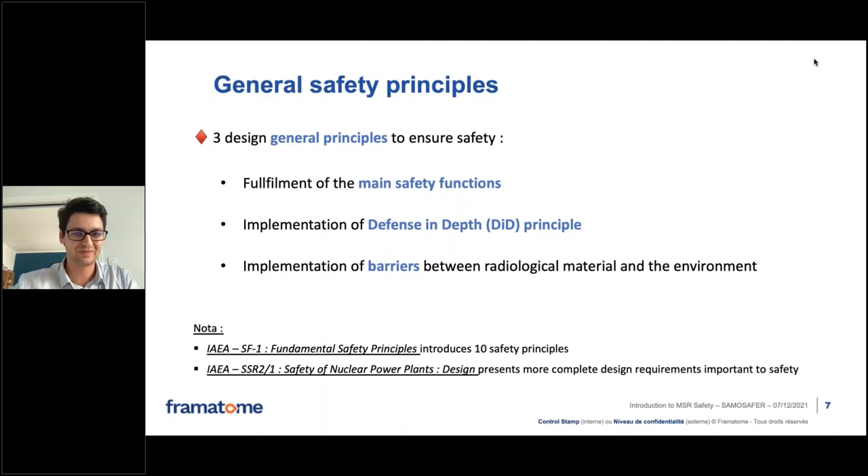So let's have a look further about the main safety functions. In a nuclear power plant, the safety implementation mainly relies on three functions: the reactivity control, the heat removal, and the confinement of radioactive material. You can note that we also talk about radiation protection of workers as a safety function, but I will not detail it in this presentation because it's specific.

You had some neutronic lectures before, and the question is, what about safety consequences? Because you saw that there are a lot of specificities for molten salt reactors compared to solid fuel reactors. Before reading this slide, I just want to precise that the issue with reactivity control is that if we have a strong reactivity excursion producing a certain amount of power that we are not able to remove, it may lead to consequences that we are not able to manage, and that's why it's very important to control the chain reaction. So for a molten salt reactor...

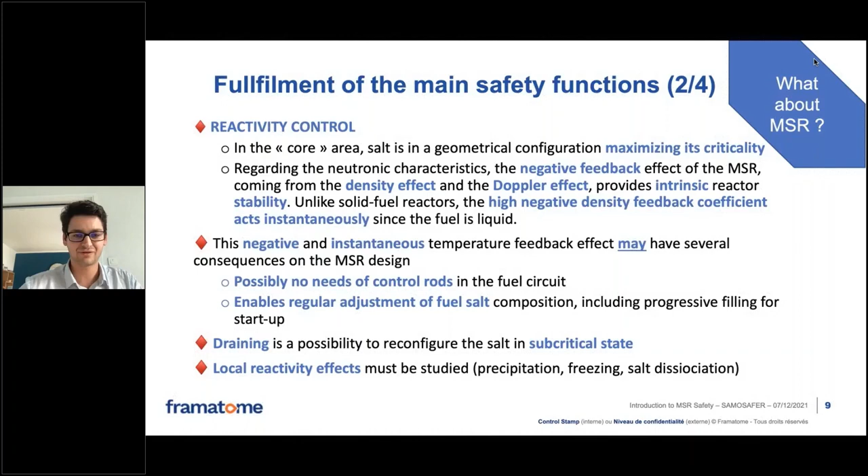So, reactivity control, now heat removal. What are the issues with salt cooling?

Finally, considering the intrinsic characteristics of the molten salt reactor, I really think the realization of this function is essential, because as we just said, for a critical salt, reactivity variations lead to a stabilization, but a stabilization at another temperature. And for structures, or even for the salt itself, the temperature must remain acceptable in order to ensure their functions, to keep their integrity, their tightness, etc. So if the temperature becomes too high, we are not able to guarantee that the performance of the structures and the material will still be enough.

So that's why it's essential to be able to remove the heat produced.

That being said, there is no huge constraint on the coolant choice, because there is no exothermic reaction identified with air or water. I don't mean that we can put those fluids in contact, but if we have a heat exchanger between the salt and some air or water, and if we have a leak, we lose the cooling function, but there is no strong additional effect chemically. So that's interesting.

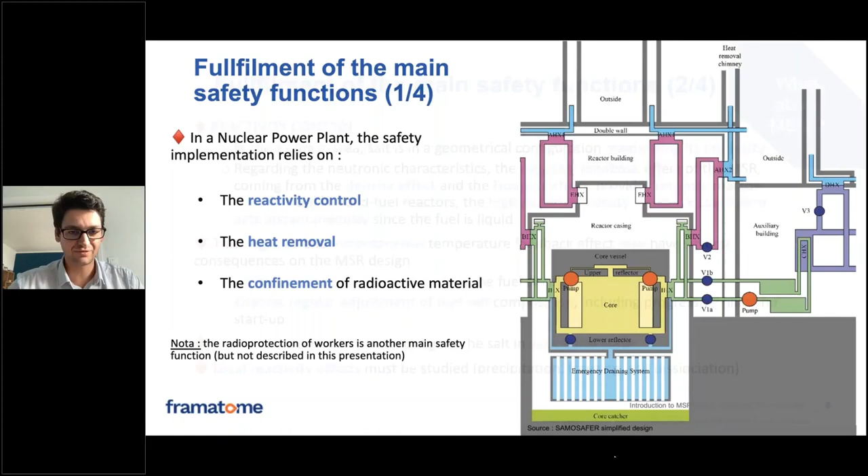So I talked about all these points. What is interesting to have in mind is that it's more comfortable to keep the salt in a critical configuration, because we still rely on the neutronic feedbacks, and that's why we generally have safety systems for heat removal implemented on the intermediate circuit.

But in case of unavailability of this circuit, we have the possibility to relocate the fuel salt. That's the idea. And when we relocate the fuel salt, we are not critical anymore, so we just perform decay heat removal.

The last point I would like to mention is that we have a multiplicity of residual power sources. We talked a lot about the fuel circuit, but there is also the fuel treatment unit, where we perform salt reprocessing, and also the gaseous extraction, because in normal operation we extract the fission products, and fission products contribute a lot to decay heat.

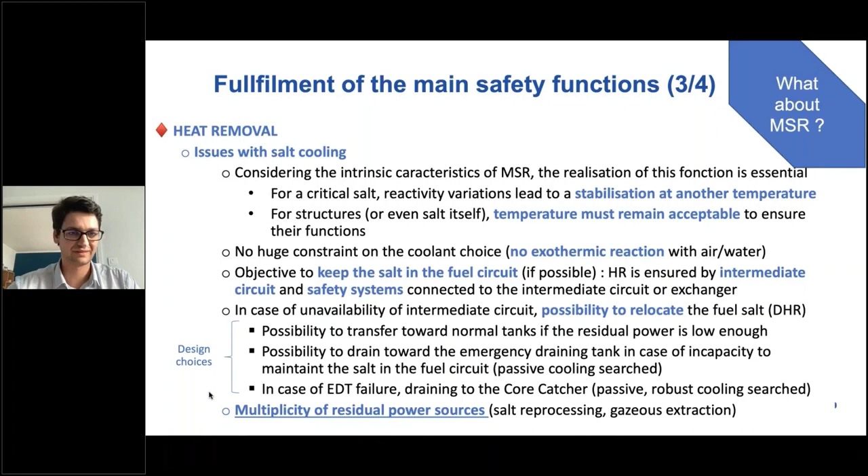So it's important to have in mind that we have to cool the fission products. Okay, so we talked about reactivity control, heat removal, and now confinement.

Confinement, of course, there is the idea of confinement barriers, but it's the third principle that I would like to present today. So I will not talk about this in this slide, but we will talk about it a little bit later. The confinement, the idea is to have some barriers between the radiological material and the environment.

What is interesting in the molten salt reactor is that there is an absence of pressure inside the containment. First, the process is unpressurized, and we have no exothermic chemical reaction. Of course, we'll have to study if we have, for example, water in the installation. If we have an interaction between salt and water, there may be additional effects creating pressure, but intrinsically, chemically, we have no pressure. And that's favorable because the pressure first is something that may push the source term from the

inside to the outside if the pressure inside is superior to the atmospheric pressure. And also it's something that may harm the containment and the safety systems that we use, for example, in order to perform cooling. If we have a higher pressure explosion, we may harm systems, and it's an advantage to avoid this issue.

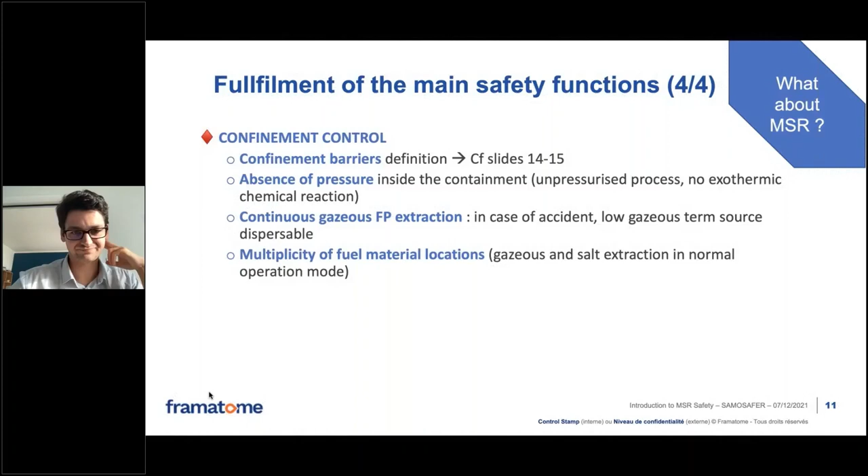Okay, so I talked about the main safety functions: reactivity control, heat removal, and confinement control. Now we'll talk about the second principle, which is the implementation of defense in depth principle, which is a very important concept in safety. Before reading this slide, I just want to remind that defense in depth is a careful

principle where we have a very humble attitude in the fact that we consider that okay, we designed our reactor, but maybe there is something that we underestimate, some risks that we forgot, some provisions that are not as reliable as we wanted. So we admit that maybe something that can physically happen, even if we implemented some provisions, this thing that may physically happen can happen, and we have to study what happens in that case. So it's that very humble attitude.

And if I take the terms of the IAEA document, defense in depth consists of a hierarchical deployment of different levels of equipment. I will detail it a little bit later, but the idea is that we have some levels of equipment in order to maintain the effectiveness of the physical barriers.

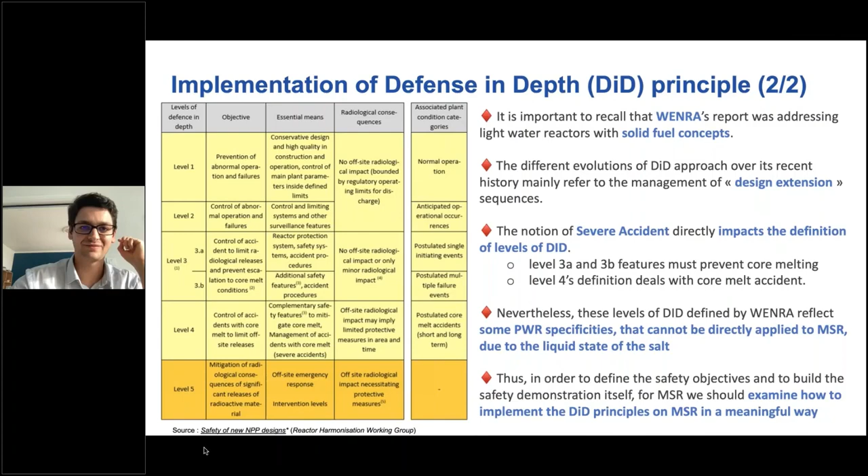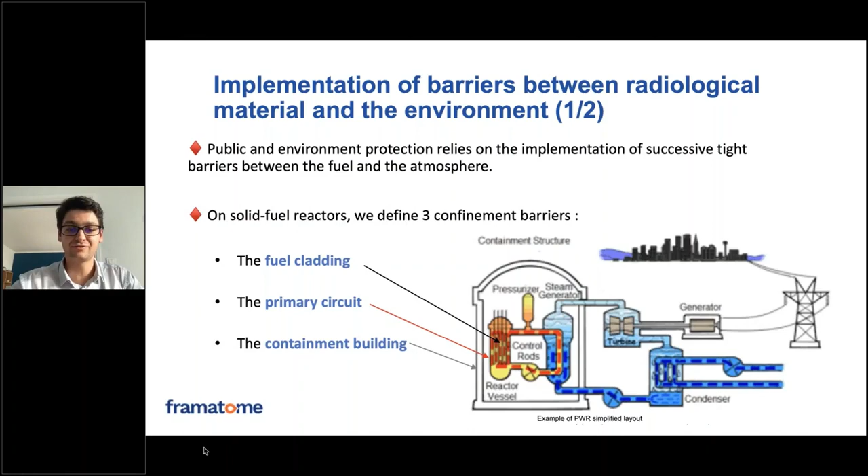So we talked about safety functions and defense in depth. Now, very quickly, the confinement barriers. The idea is pretty simple: put successive barriers between the fuel and the atmosphere to protect the public and environment. On a solid fuel reactor, we usually define 3 confinement barriers: the fuel cladding just around the fuel, the primary circuit, and the containment building.

On a molten salt reactor, since the fuel is liquid, the usual first barrier, the cladding, has no direct equivalent. So the confinement barriers also have to be defined in a meaningful way, considering the molten salt reactor specificities, including the multiple locations of the system.

So when we're talking about confinement barriers for molten salt, it's an open question. We have to justify the number of barriers necessary. Maybe it will be at least 2, but maybe 3 are necessary. It's the main question for molten salt reactors.

So we are almost sure that it depends on the design, but the fuel circuits will be the first barrier. But there is a question: do we need a second barrier? And the last barrier, I think, will be the containment building. But once again, it depends on the final design of the reactor.

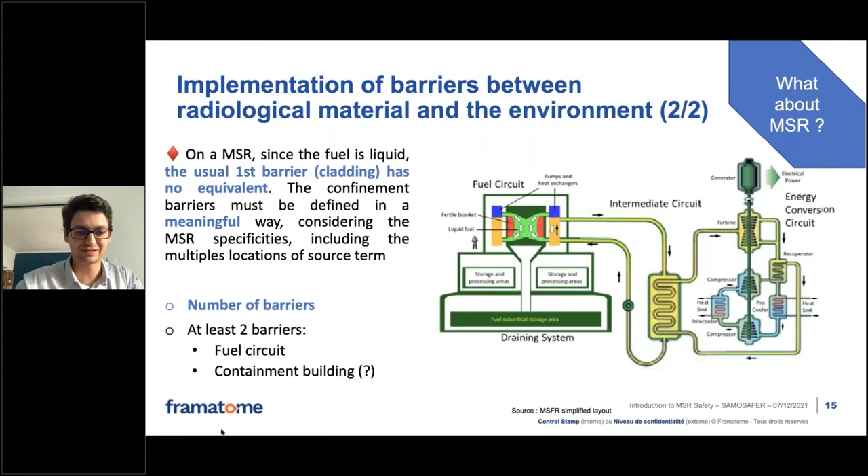So I presented the 3 main safety principles in order to integrate safety at the design of a molten salt reactor. Now I will very shortly present the methodology that we are applying on the SAMOFAR and SAMOSAFER projects in order to implement safety at early stages of design.

The question is how to make the link between the safety objectives, and even the safety principles I just presented, and the design. How do we make that link?

The Generation IV International Forum, the GIF, developed a methodology called ISAM, Integrated Safety Assessment Methodology, aiming at integrating safety at early stages of design. This methodology was thought to be applied for all Generation 4 technologies. For molten salt reactors, we still have some specificities, so we adapted this methodology a little bit, but the idea remains the same. In this diagram, we have some objectives, principles, and guidelines that we have to respect, and it's important to define this.

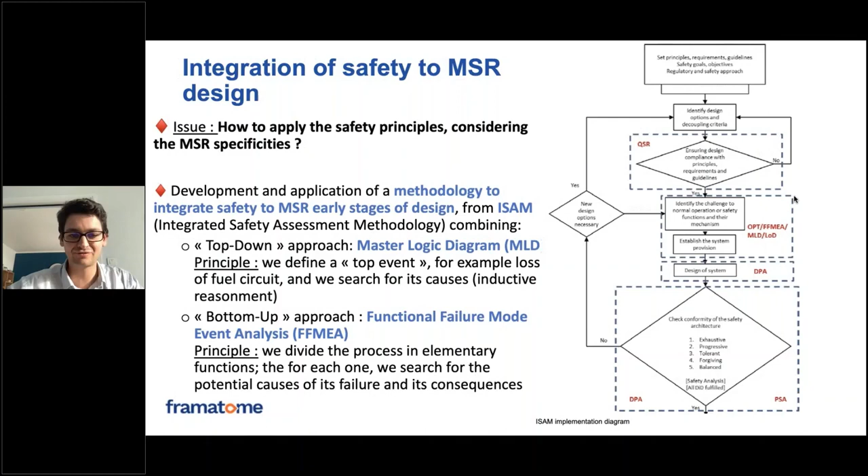So in order to identify the different families of risk, we use two tools: the master logic diagram, MLD, and the functional failure mode event analysis, FFMEA. I will just show you some examples. This is an example of FFMEA. The idea is to take our reactor and write all of its functions, all the functions that it ensures.

And the idea is to go from the generic function, for example to generate electricity, to the most elementary function. It can be every kind of possible elementary function, safety function, or operational function. At this stage we don't mind. When we consider only the elementary function, we ask ourselves two questions: what are the consequences if this function is not ensured anymore, and what are the causes that can lead to the failure of this function?

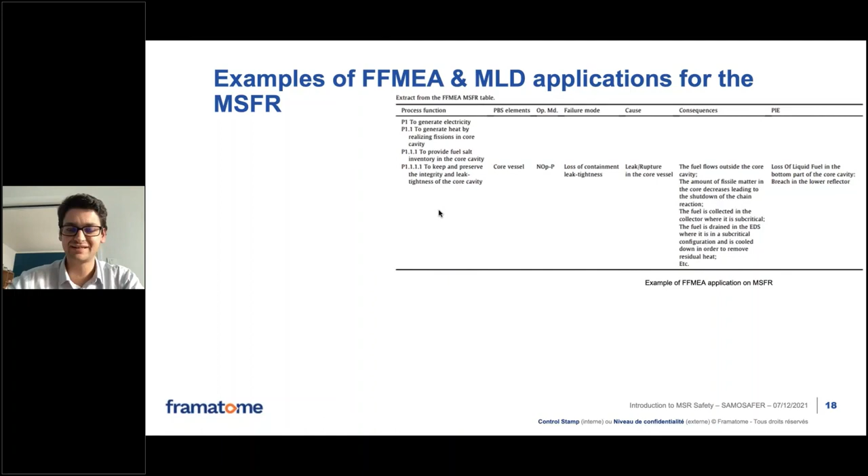This first questioning enables us to generate a first list of initiating events, and we can complete it with another tool, the master logic diagram. With FFMEA we have a strategy called bottom-up: we go from the elementary aspects to the more global consequences. With MLD the idea is different, it's top-down, so we consider what we call a top event.

For example, the failure of a containment barrier—in this example, the degradation of the core vessel. From this top event, we look forward to every phenomenon, every cause of this major risk, and so on. From each phenomenon, we look forward to its causes, etc., until we reach very elementary reasons that may lead to the loss of the function.

The combination of these two tools enables us to set up a list of initiating events for molten salt reactors. The results were quite the same, but we had some events identified thanks to the FFMEA that we didn't identify in the MLD, and at the opposite, but mainly it was a confirmation of the identification of the risk.

That's it, I finished my presentation. Just before ending, I'll give you some references of work to perform in SAMOFAR and SAMOSAFER about safety issues. If you have any question about these references, please feel free to ask at the end of the presentation, or maybe later, I'm still available. So that's the end of the presentation.

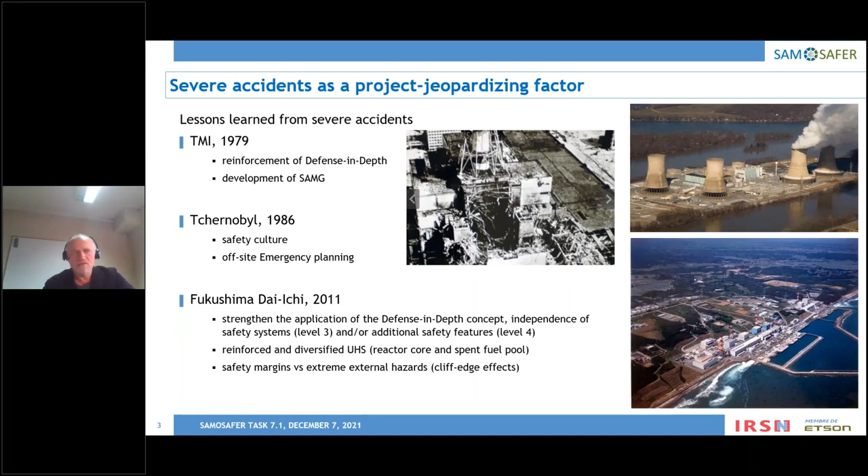Then, of course, we were talking about safety margins needing to be increased and designed to comply even with non-realistic hypotheses. Because what happened there is just that the earthquake was much higher than expected, and this is why safety margins were not relevant to this extremely low probable case. So we might not rely on probability when assessing safety and fighting for safety.

Then, talking about the regulated environment, I should note that from the very beginning of the nuclear era, we began to talk about safety rules, safety guidances, safety standards, and so on. Because of what? Because we did recognize that not the people, not the persons, but institutes should be on the first line of safety. Institutes means organizations, agencies and so on, but their role is very high and important. At the same time, their actions need to be standardized, to speak one-to-one the same language.

This structure, this system of relevant standards, guidances and so on, is available on the basis of the International Atomic Energy Agency. You can see the entire list of those standards. Some of them are relevant to our needs because we are not talking about the reactor, safety relates to the reactor and operation, to the real system.

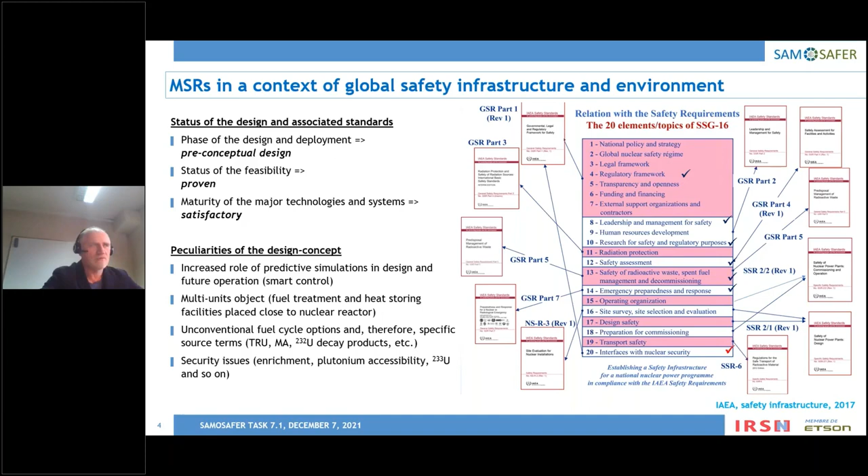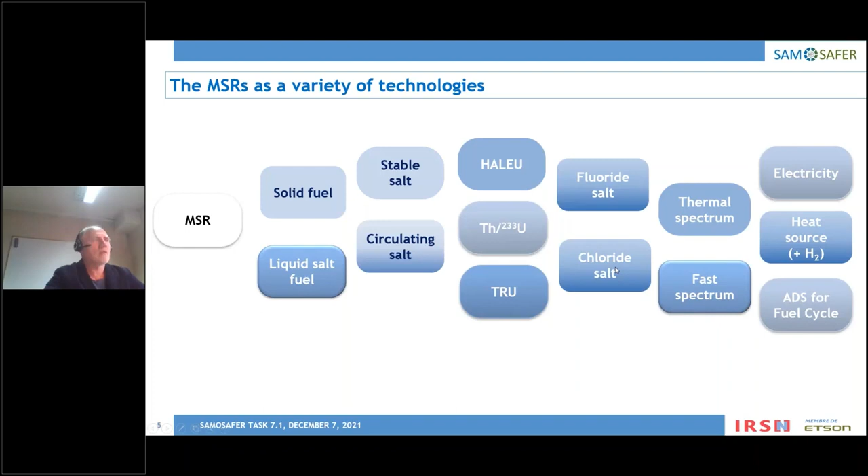Talking about molten salt technologies, we can see the variety of them and the variety of elements of those technologies. We can design a molten salt reactor with solid fuel, liquid fuel, stable salt, circulating salt, with different fuel, with different salts, with different spectra, with different applications. Honestly, safety requirements and the safety environment need to be adapted to all the families of molten salt systems.

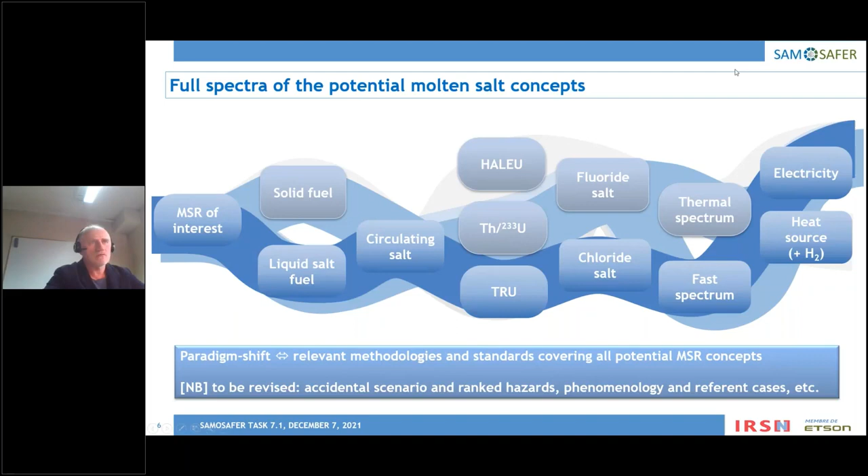At the same time, a deep and fairly easy analysis of the potential, of the plausible reactors to be built, demonstrates to us that the degree of freedom for designers is not so high. In fact it's limited, because each reactor and each technology is a very expensive thing, and it might be designed and might be accepted not only if it will be safe, but also if it will address one or another challenge, an impactful problem - important for humanity and important for the sustainable development of the nuclear industry and nuclear energy. In this case, what will the technical support organization see, and what will the regulator see from your design? This organization will not see the design in very detailed matters.

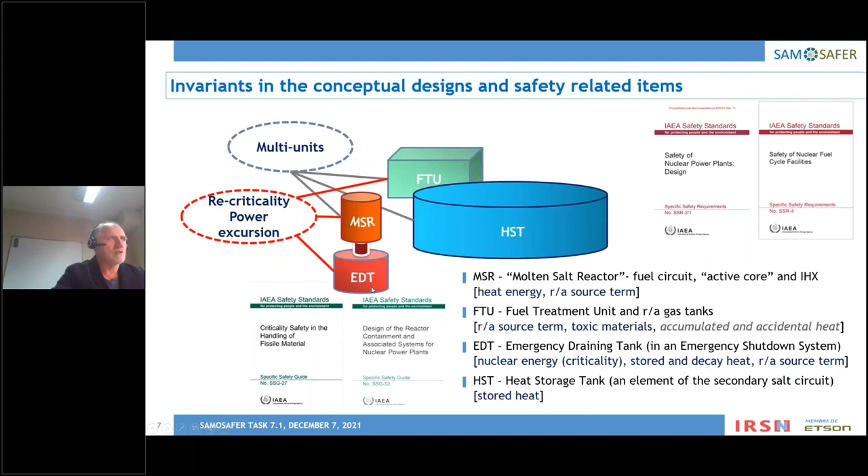Then, safety objectives and all the structure and system of documents to be implemented when we are designing and constructing not only the reactor, but the infrastructure and the basis for its implementation. First, we should admit that risk management is a key point and the key action started from the very beginning of reactor design. So we should think about it before construction and even before the design studies.

Then, all risks should be assessed, all risks should be analyzed, discussed, and so on. And third, as I mentioned, the way of risk addressing and risk precipitation is institutionalization of the risk, risk assessment, and regulation.

Safety has no borders - not only geometrically or country borders, but also safety has no borders along the design process. So each time we are thinking about safety.

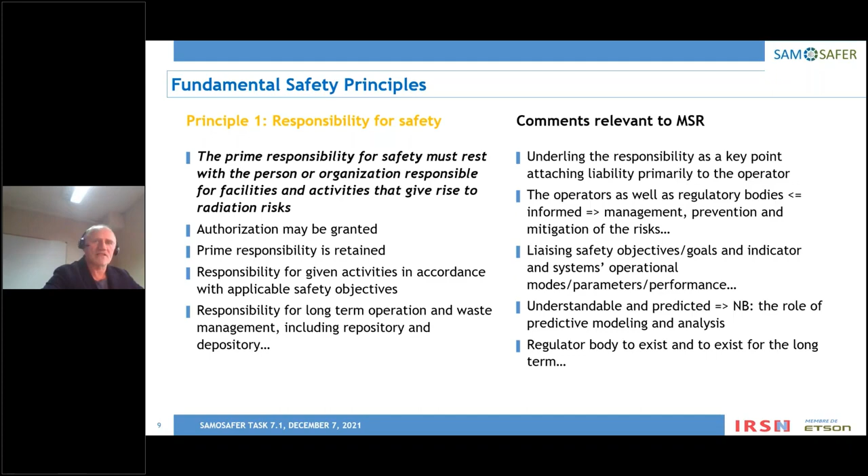And then, the role of government. Government establishes the regulatory body, authority, or committee, and government does it in a way to guarantee the independence of those regulators. So I think everything is clear - the licensee deals with the existing regulatory body and existing standards.

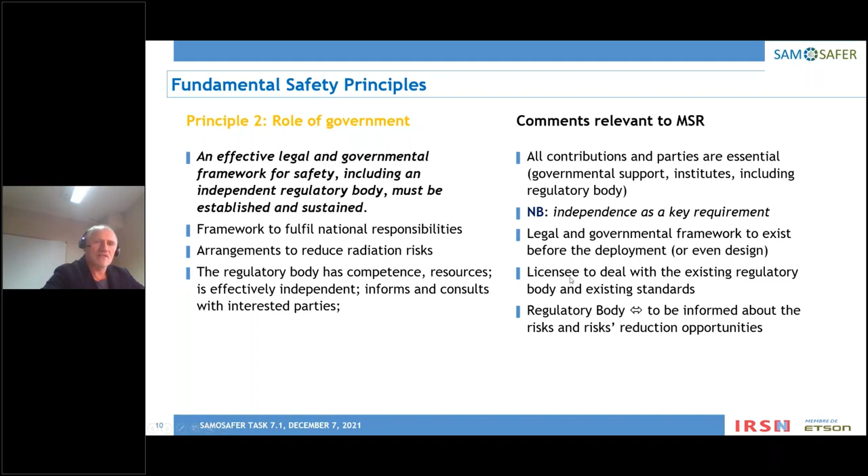Legal and governmental framework needs to exist before deployment, and regulatory bodies, as well as designers and operators, need to be informed about the quality of risks and opportunities to reduce them. But everything should be based on evidence, not just declarations. Everything must be demonstrated in a clear, credible format.

Leadership and management - we are talking about management and leadership inside this safety management framework. It's relevant to the organization of the operator and to authority, relevant to building up the management structure, the management chart, and so on. I think that everything is clear.

What I should note is that the IAEA recommends using a graded approach for safety analysis and safety assessment. Graded approach, among others, simply means: more risk, more uncertainty, more stringent regulation. This is why risks and uncertainties need to be evaluated and taken into account in building up the regulation structure and process. For us, it's important because we have a lot of uncertainties and non-identified risks, since our feedback experience is limited.

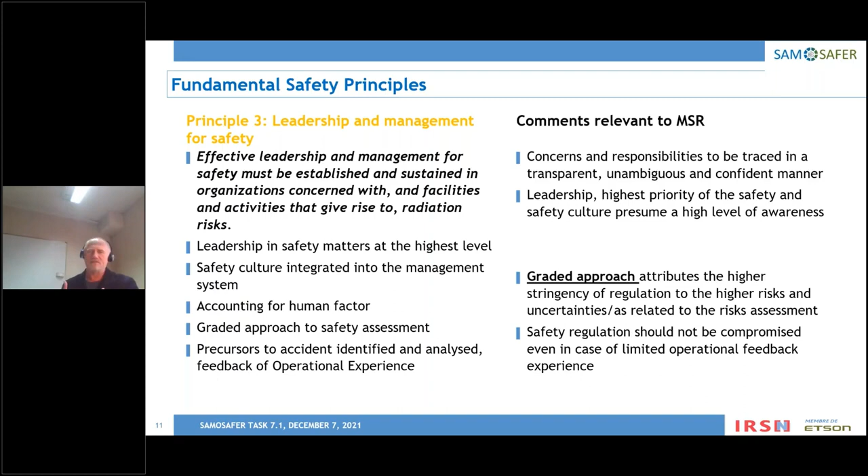Then, justification of facilities and activities. What is important here is that facilities and activities that give rise to radiation risk must yield an overall benefit, where the benefits must outweigh the radiation risks.

What does it mean for us? It's something useful to optimize our design, because it's a source of optimization, a source for going toward informed regulation. In this case, we have to design and deploy a system that will be better than before. For us, it's important - it should be taken into account, and for designing molten salt systems we should identify where and why we would be better than others.

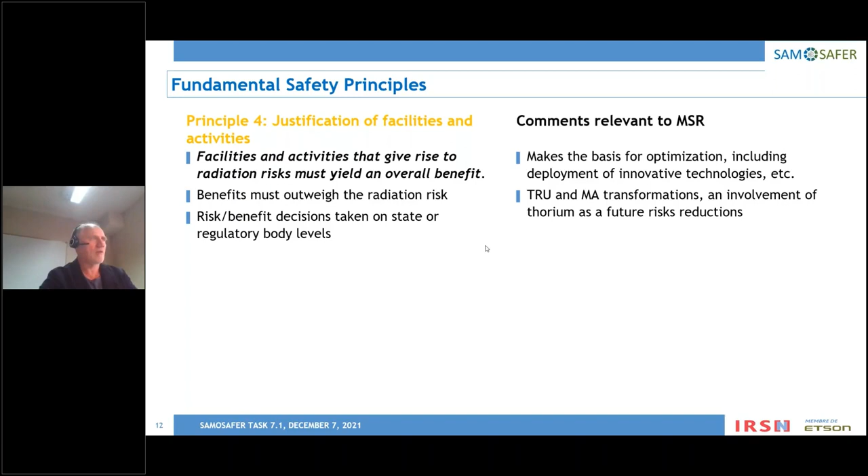Then, optimization of protection. It's just a continuation of the previous fundamental, because it means we have to apply the ALARA principle - safety should be as high as reasonably achievable, providing the highest level of safety that can reasonably be achieved.

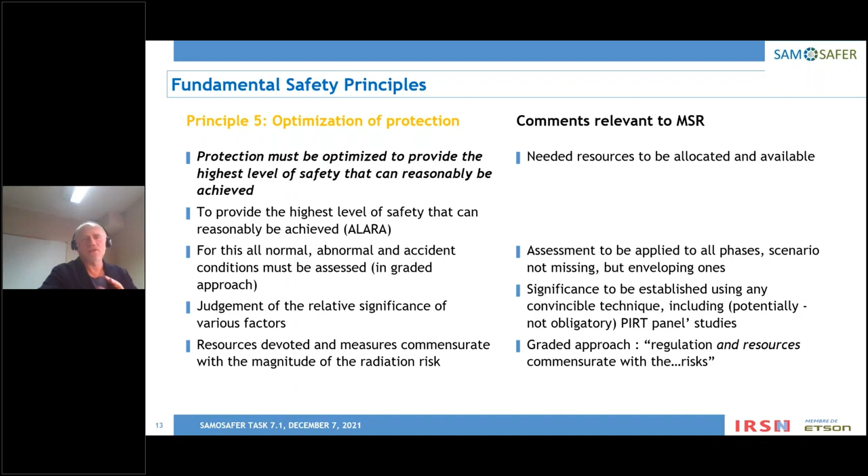For me, it's clear - we should analyze and judge the relative significance of various factors. How? The typical approach is PIRT, expertise and expert studies. One problem we will face is that we don't have so many experts because our expertise is limited - we have not yet had the same or similar systems in operation. This is why we should combine these approaches with theoretical analysis, sensitivity studies, and brainstorming as well.

Principle number 6: limitation of risk to individuals. It's clear this has been involved since Chernobyl, because before, we were oriented in the fuel cycle, for example, toward collective risks. It has been decided that this is no longer relevant, and this is why each time we are analyzing the impacts and consequences for each individual person.

Principle number 7: protection of present and future generations. It's also a clear principle. If we do not impose such a requirement, we will not answer the question of at which distance, and for how long, we will guarantee safety. There is a risk that after 1, 2, 3, 10 years, our safety barriers will degrade and safety will not be provided. Then, after 10, 20 years and so on, we came to the idea that everything must be protected over the long term.

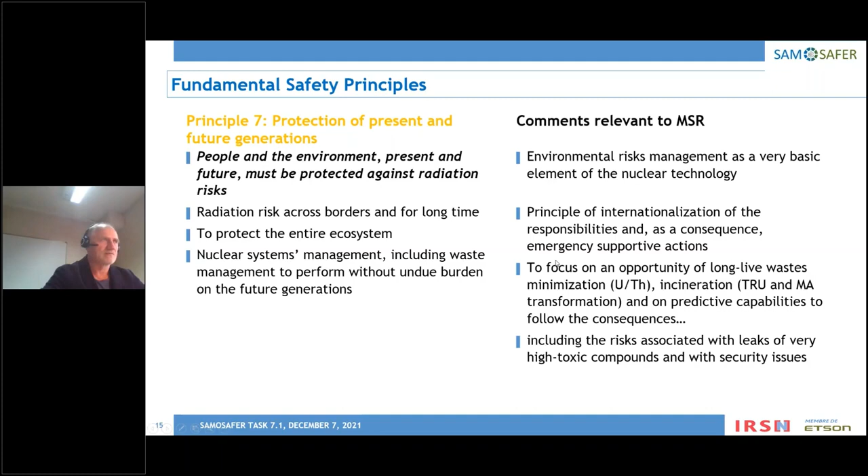Then, prevention of accidents - this has been discussed before. I would like to mention that prevention of accidents and accident management is the key point for safety assessment and safety studies. When talking about accident management, we are talking about prevention of escalation of an accident from one level to the next, mitigation of consequences if possible, and achieving a long-term safe, stable state.

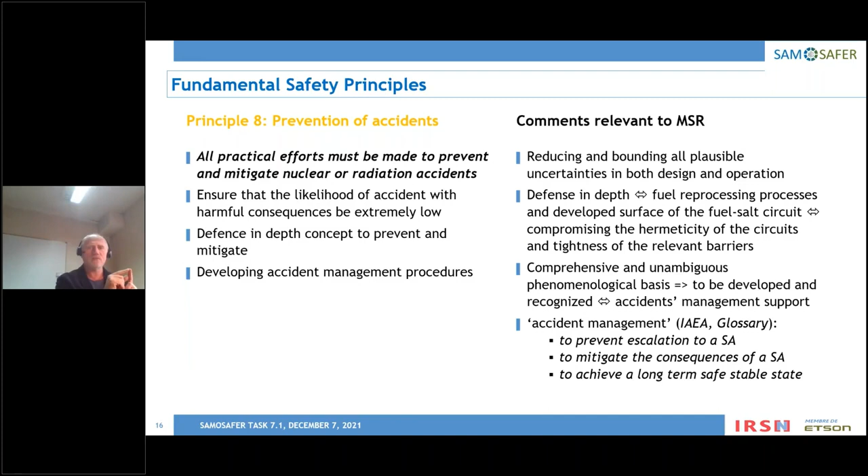Also, talking about accidents, we should take into account that an accident is a process - it's not just an entity in itself. An accident is a process that starts from an initiating event, continues, and then ends with a safe, stable state. So we have to analyze everything and manage the system's trajectory throughout the entire accident.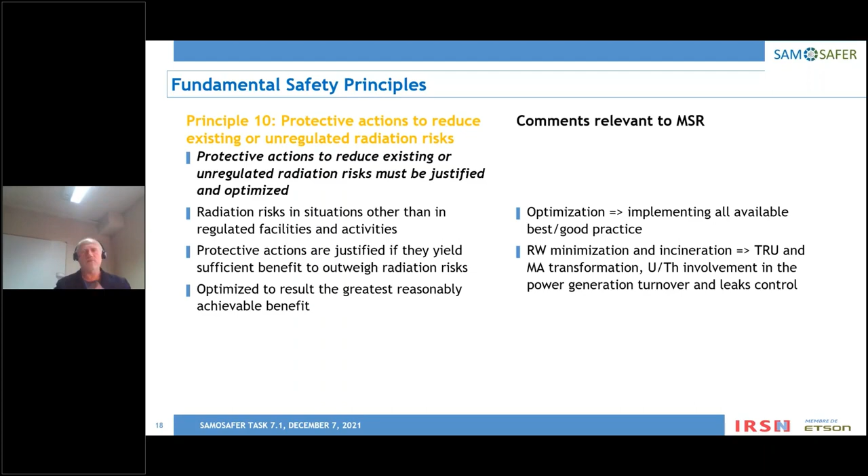And after Fukushima, we saw it, that nobody could imagine either the tsunami, either the actions, either the failure of the team who was working on site, and so on. This is why all residual risk and unregulated risks need to be bounded, at least, and understood.

Then, when designer, vendor, and applicant asks for the license, they used to present a safety report, preliminary safety analysis report, or final safety analysis report to the regulator. The first reader, the first organization that will read the safety report, will be a technical support organization, such as our IRSN, or NRC in the United States, or something like this. And there are certain kinds of judgments, certain kinds of standards on those reports, but the majority of them are relevant mainly to light water reactors.

Look, the typical content of a safety report: general description, site characteristics, structure, components, equipment, reactor, coolant. In our case, coolant and fuel are not divided. Engineering safety features will be instrumentation control, electrical power, auxiliary system, steam and power conversion system. In our case, it will be power conversion system, not steam.

Radioactive waste management is much more complex in our case. Radiation protection is universal. Conduct of operation, it will be, except for certain items that need to be taken into account, which I will mention. Accident analysis is universal. Technical specification, quality assurance—all of them are relevant to the reactor in operation. In our case, for a paper-based reactor, we have no idea about it, not yet, but we should think about them.

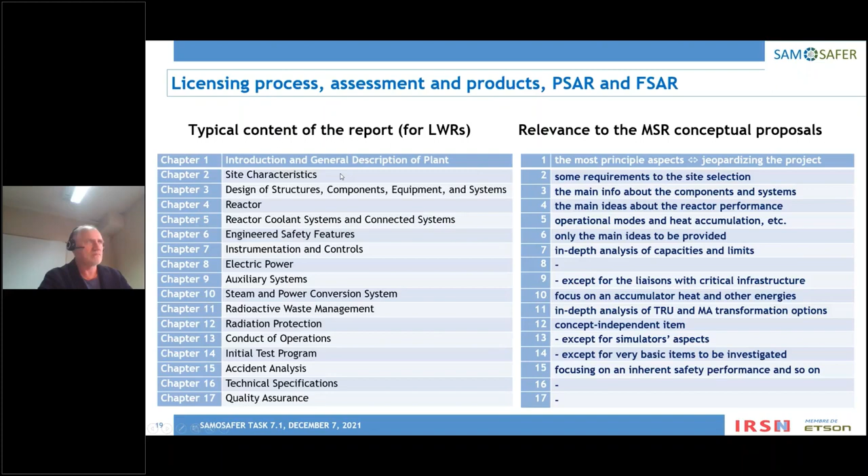So the content of the safety case report typically includes: scope, system description, system hazards, safety requirements, risk assessment, hazard control, safety analysis and tests based on evidence, demonstration of the safety management system and explanation of how it works, the developed process of justification, and of course, conclusions.

Everything, risk of failures, risk assessment approach, scenario, ranking analysis are incorporated inside in free format. Typically for PWR, for BWR, we have well stable formats, and people used to follow them because it's much more easy. It is harmonized on the basis of European Association of Regulators, WENRA, and on the level of technical groups and technical reports of IAEA, etc.

But honestly, they are not fixed. They should answer only one question: they should demonstrate the safety argument, protect that safety argument, and then demonstrate to the authority that safety goals are reachable and can be achieved.

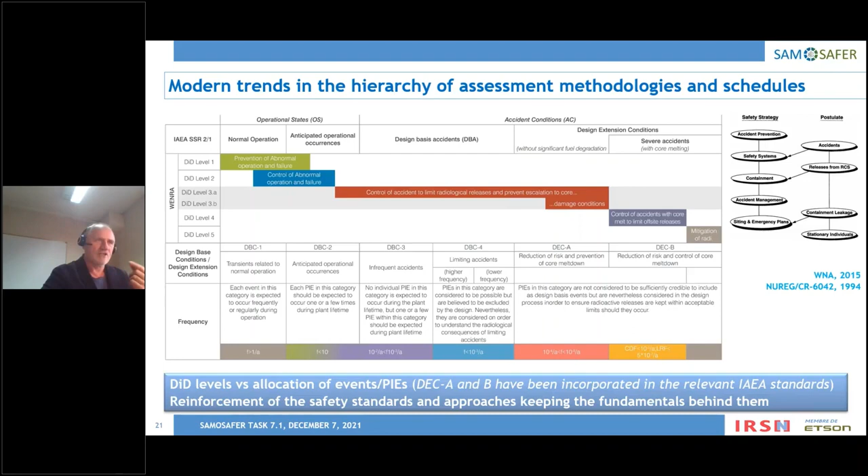Nowadays we are doing almost the same, but we mention design base conditions - four levels of conditions, design extended conditions, design extension conditions A without core melting, with core degradation. Condition means that everything is to be analyzed, presented, and assessed. So the new idea is to assess everything and to assess the capability to manage the accident at each level.

But at the same time, integrals would be taken into account. When considering probability and severity, it looks like this: we are preventing, trying to reduce probability, and concerning severity, we are mitigating the consequences.

Then the risks we deal with: simple risk, aleatory risks, epistemic risks - meaning something wrong in the very basis of our concept, the unknown, fog of ignorance - and ontological risks. For our systems, ontological risks are elevated compared to others because we don't have significant experience.

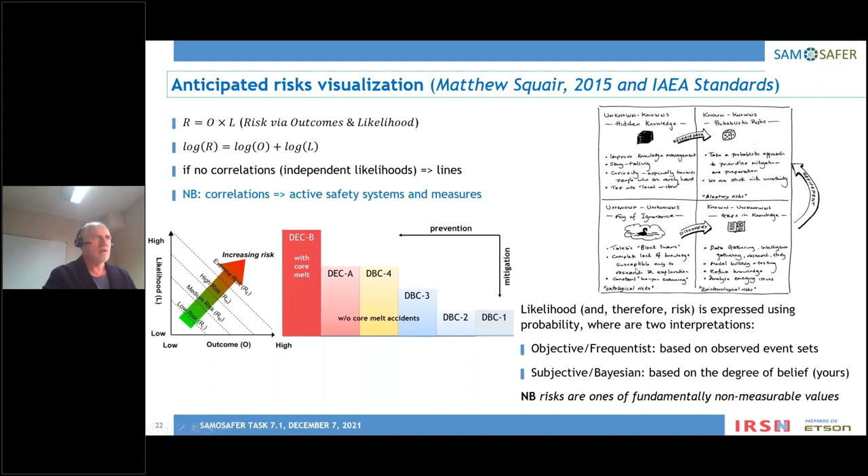Also, many things are not fixed, are flexible, and one of those is safety barriers associated with defense in depth. Don't forget the typical safety barriers for light water reactors, starting from fuel to clad to primary circuit to secondary circuit to containment - these are given for information only. You are not obliged to design and demonstrate the same, absolutely the same idea and ideology. You can establish the first barrier here, or here - it's up to you.

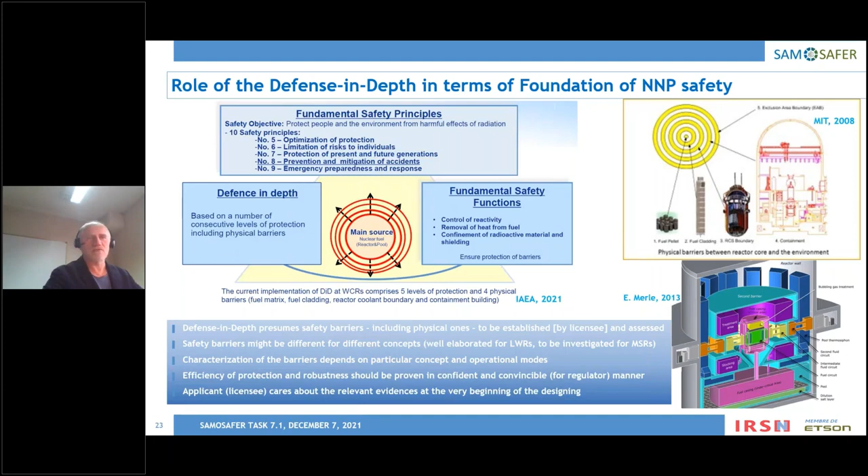But it should be credible and consistent, based on evidence where you can demonstrate - where we will be able to demonstrate - the robustness of those barriers and the fruitfulness of those barriers.

Then we have 5 minutes to the end, and this is why I reduced my slides and comments on slides. So the major factors to be taken into account when we are talking about molten salt systems: design concept and operation modes should be compatible with an existing safety infrastructure and regulatory environment.

It's clear. So what is important for designer and for researcher? That is a concept to be adapted. Infrastructure might be only enhanced before deployment of molten salt systems.

Unfortunately, we face the problem of limited feedback experience for large-scale molten salt reactors. And we think that the feasibility should be demonstrated progressively from small to bigger and bigger prototypes.

Concerning first-of-a-kind low-scale systems, I don't see that we will face problems because they would be regulated as research reactors, so it's much easier to do. The safety culture on a well-protected area where the excellence is high is much easier to achieve, and this is why we will not have significant problems with them.

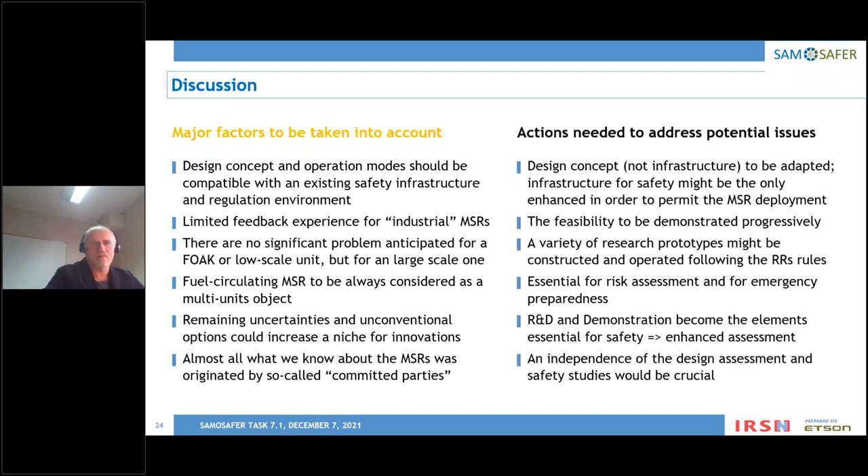Unfortunately, that doesn't work for the regulatory environment. We have to have an independent point of view and an independent source of information and judgment. This is why addressing the demands of responsibility, resources provision, and radiation protection by institutionalization is the key point for safety.

Applicant and licensee, all licensees, shall comply with the authority's decision, where standards and guidance could be modified, but they are used by the authority to facilitate judgment. The regulatory body should have sufficient competence and available resources to perform the regulation.

But competence might be developed by exchange of information, by sharing information worldwide, and even to a regulator. Data and evidence we are dealing with now are originated mainly by committed parties, so independence of judgment needs to be enhanced. How - that's another point, but it's also possible.

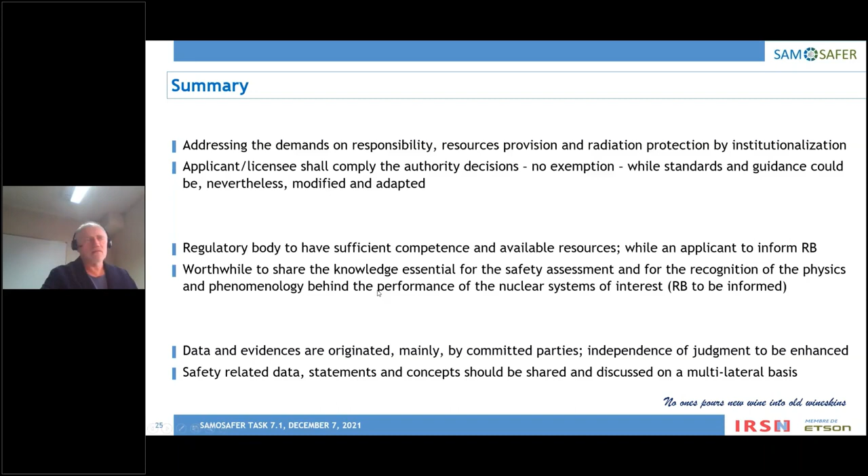And I think that safety is inverse to design in terms of industrially confidential data. If for design we are trying to protect by royalty everything and all our ideas, in safety we should follow the inverse way: to open everything, to demonstrate the capability to provide safety. Thank you.

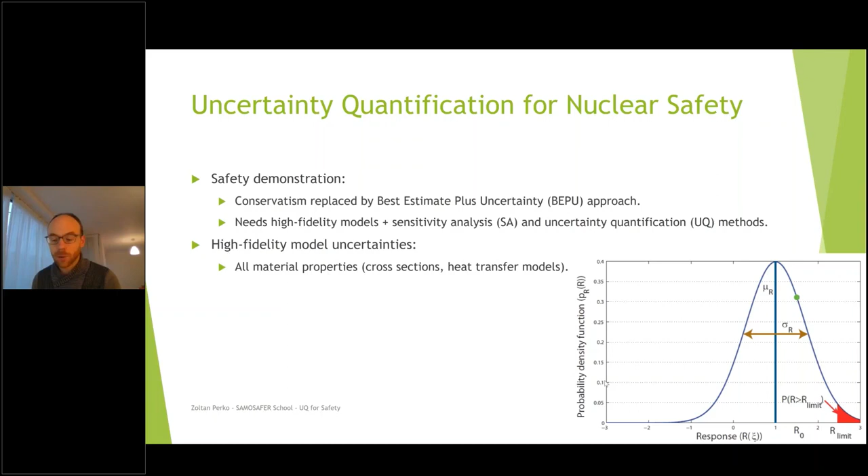So why are we, or what kind of uncertainties are we worried about? Basically, you can think of the sources of uncertainties as anything that you would use as data in your reactor. So these are all the material properties, typically cross sections, but also thermal properties, also things like heat transfer laws and heat transfer correlations, etc.

These are things like geometries. So for example, if you think of a standard reactor, then you could think of the pins bending or some mechanical vibrations, thermal expansion, but you could also think of things like chemical deposits or crud that would locally change flow conditions, etc. Also compositions, you can think of either material impurities, or especially important for the MSFR, the whole composition of the salt, right? And that has all kinds of consequences to the neutronics or to the chemistry of the system.

I put this in a bit of parenthesis, but also there are some uncertainties, of course, from the modeling choices that you make. So things like what type of discretization you use, what type of coupling scheme that you use. Obviously, these are not the same type of uncertainties, but they do have an impact on the accuracy of your results.

And as I mentioned, basically what we want is that we want to know the exact relationship of how the important outputs from our high fidelity models, so these safety parameters or parameters that are important to safety, how do they depend on all the inputs and on the uncertainties of the inputs. And why I want to know these relationships is because, of course, we want to use this information to post-process and to derive things like identify the most important input parameters, maybe identify what type of properties need to be measured more accurately.

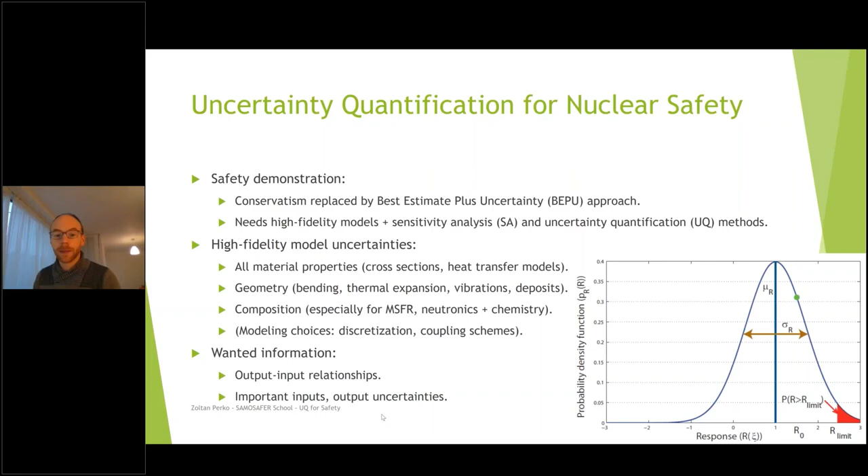Now, why this is challenging - I'm not going to read every single number here, but just to give you an idea. The problem is that for high accuracy, we want to use high fidelity models. High fidelity models mean you need expensive models that are very realistic, so they accurately describe the real physics and chemistry that happens in reality. And you need very fine discretization.

So if you think of an MSFR type model, it would mean that if you just look at the neutron transport part, you would need something like on the order of 10,000 finite elements. If you have tetrahedrons with 4 linear basis functions, 24 angles, let's say 6 to 8 precursor groups, then easily you see that the output you calculate is around 10 million parameters for every single time step. So it's a very expensive model, just the neutron transport itself.

Then of course we know that we don't only want the neutron transport, we always want all the physics that is happening in the reactor. So you would always have this coupled to at least thermohydraulics, but especially for the MSFR, chemistry, etc.

Just the thermohydraulics part, again, you do the same type of analysis. What is your spatial discretization, time discretization, etc. Again, you end up with numbers like 1 million parameters for every single time step, and depending on how the transient goes, your time steps may need to be very, very fine. So that can be something like a millisecond.

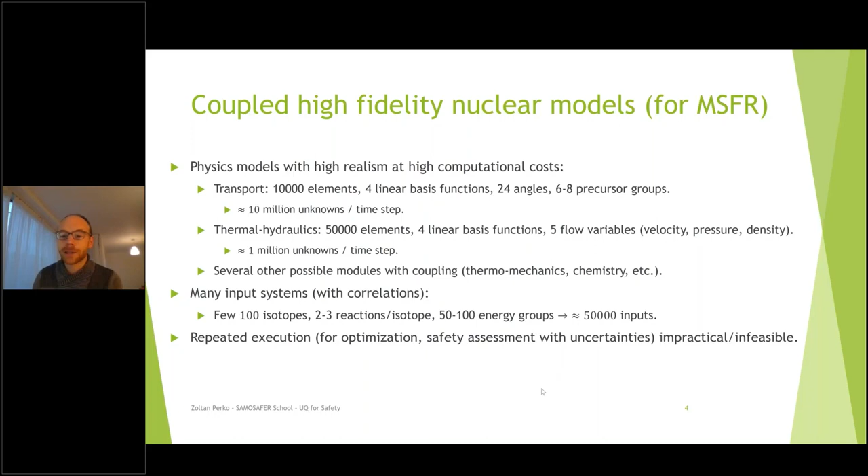And of course, this is exactly what we want to do when we do uncertainty quantification, but also for things like optimization. If you want to figure out what is the best combination of parameters, you would try to find that sweet spot in this very high dimensional input space where your reactor performs the best. So that's the general background.

Now, just to introduce some formalism that I will use, I will always describe all these uncertain input parameters as a vector xi. This is a vector of n variables.

In reality, that can of course depend on how complex your model is, but typically this is at least in the hundreds, tens, thousands, tens of thousands.

Since these are all uncertain input parameters, we assume that they are random variables and they follow a certain joint probability density function. We need to know this joint PDF, and if there are any dependencies between these inputs, any correlations. This is the typical example for all neutronic parameters, because there's a lot of correlation between the different group cross sections.

Already at the beginning, when you do any kind of uncertainty quantification, you should think about getting the best information possible. That means you want realistic, accurate information about not only the parameters but also their uncertainties, because it's the garbage in, garbage out problem. If you don't define your input uncertainties correctly, you cannot expect your output uncertainties to be realistic.

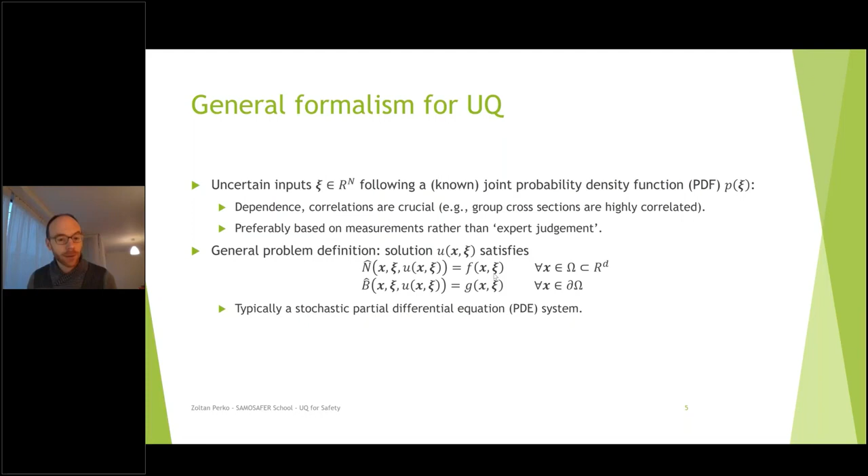Typically, what all of this math basically hides is simply a set of coupled partial differential equations. You always have this xi dependence everywhere because some of the parameters, some of the numbers in this PDE system, are random variables. So technically, these are stochastic partial differential equations.

What we want to know is how the stochasticity in our input vector xi propagates to specific responses. Ideally, we would want the full dependence of any response as a function of the input parameter xi. Most often this is very complex, so we're happy with at least knowing the mean value or standard deviation, or maybe the probability that a critical safety parameter is below or above some limit. Of course, if you really want to know everything, you want the full dependence of the solution field on the input parameters.

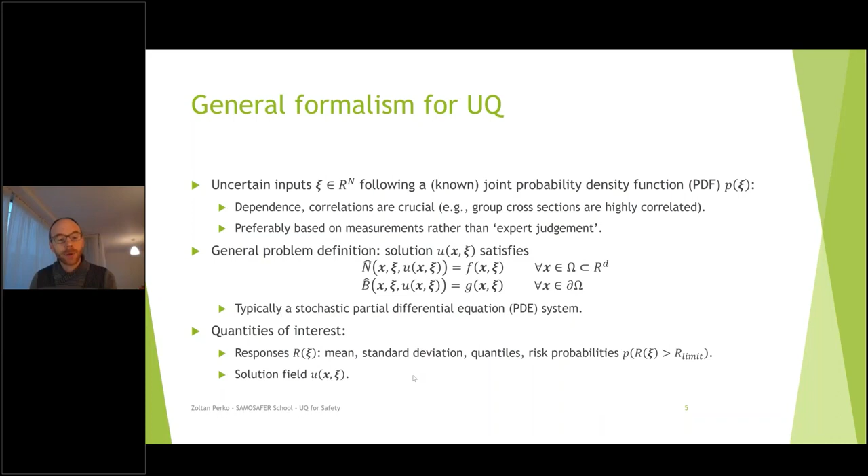This is kind of the general overview, and now I'm going to give you three specific methods that can help you get and obtain this information.

The first of them is adjoint methods. What adjoint methods do is, when I write this dependence, that we have some safety parameters R, and they depend on the uncertain input parameters xi, this is actually a shorthand notation for two different types of dependencies: one can be a direct dependence on the parameter itself, and one can be an indirect dependence via the solution field.

Let's say I'm calculating a temperature field, and the response you're interested in is the maximum temperature in a transient. In that case, this response would simply be the maximum of the full temperature field. So if I want to know how that depends on, let's say, a heat conduction parameter xi, then obviously the maximum temperature does not have a direct dependence on the heat conduction parameter, because it just isn't there in the formulation of that response.

It only has the dependence via the full temperature field. So what adjoint methods very simply do is say: if I cannot have the full functional dependence of this response, let's have the next best thing possible, a first order Taylor approximation. So let's at least locally try to approximate the real dependence as a linear dependence.

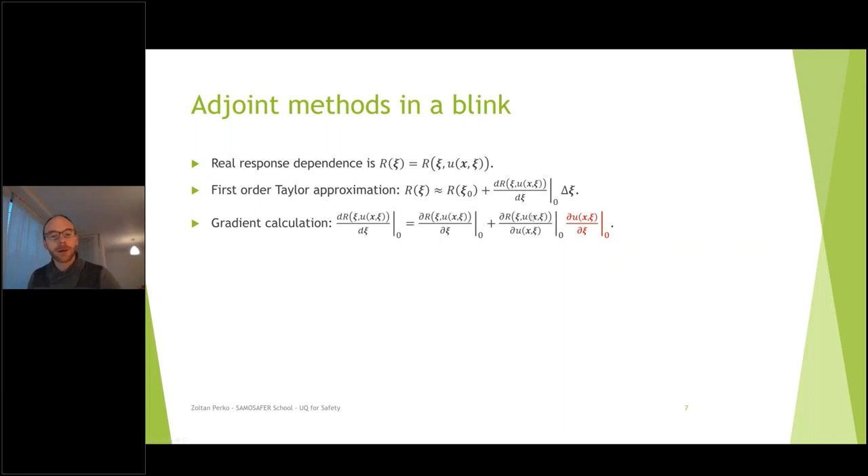The tricky thing is how we calculate this gradient. If you look at the definition of the response, you can easily see you will have to use the chain rule here. You will have a direct term, which is the dependence of the response on the parameters directly, and an indirect term, which is the dependence of the response via the solution field. The really tricky thing is calculating this indirect term, because it means I want to know how the solution of my PDE changes if I change any of the input parameters.

One way to calculate this is a brute force way called the forward way, where I approximate this as a finite differencing. It means I perturb individually every single input parameter, recalculate, solve again the PDE, and I have the finite difference approximation for this gradient. This means you solve 50,000 times the same very computationally heavy calculation. It's not really very efficient.

So the beauty of adjoint methods is that they can basically give you this full gradient, the derivative for every single parameter, with one single calculation per response. I'm not going to go a lot into the math of how adjoints work, just give you a very brief intro. Basically, the whole reason why it can work is connected to inner products and adjoint operators.

Inner products you can think of as operations on a vector field. If you have two functions, f and g, both depending on the same independent variables x, you can think of the inner product between these two functions as the integral of their product. If you go back to Neutron transport, your independent variables are spatial position r, energy E, direction omega. The inner product on this field would be that you integrate over volume, energy domain, and the full angle, the product of the two functions.

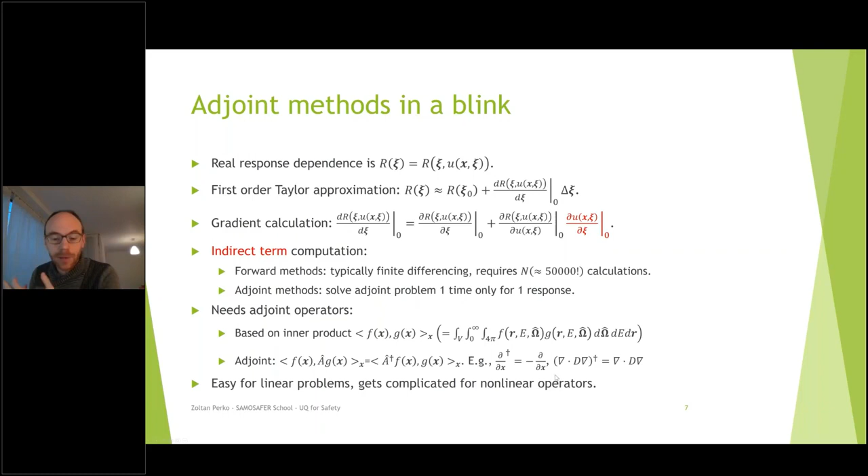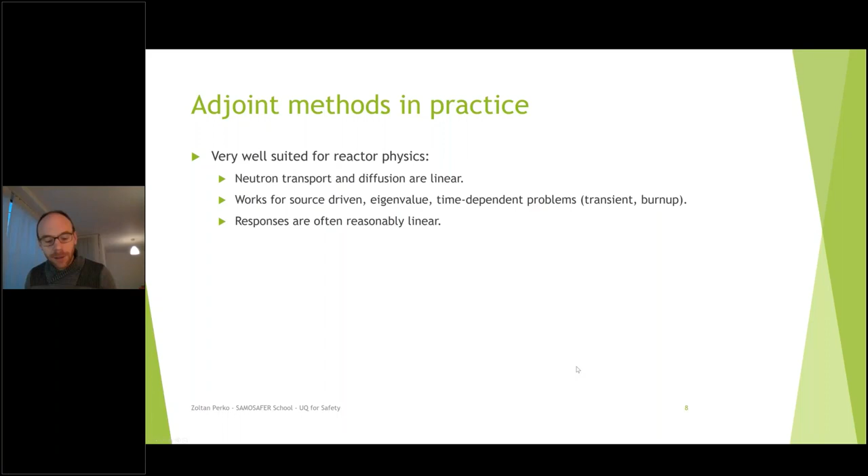The difficulty is it gets progressively more complicated for any nonlinear problem, because you first have to linearize your problem. Luckily for us, a lot of the problems in reactor physics are actually linear. If you think of Neutron transport, Neutron diffusion, they are both linear. All the important cases, source-driven, eigenvalue, time-dependent problems, even including some transients and burn-ups, they are linear. So you can use adjoint theory for all of these. Even if you look at only the neutronics itself, a lot of the responses themselves are also linear.

So basically what that means is that the Taylor approximation actually works reasonably well. Also, the types of responses that are easy to calculate with adjoint theory are these reaction rate or reaction rate ratio type responses. For reactor physics, they are often exactly the type of responses we want, because we often want things like fission to absorption ratio, or group cross sections, or power peaking factors or inhomogeneity factors. All of these can be written in a format that adjoint theory allows us to calculate.

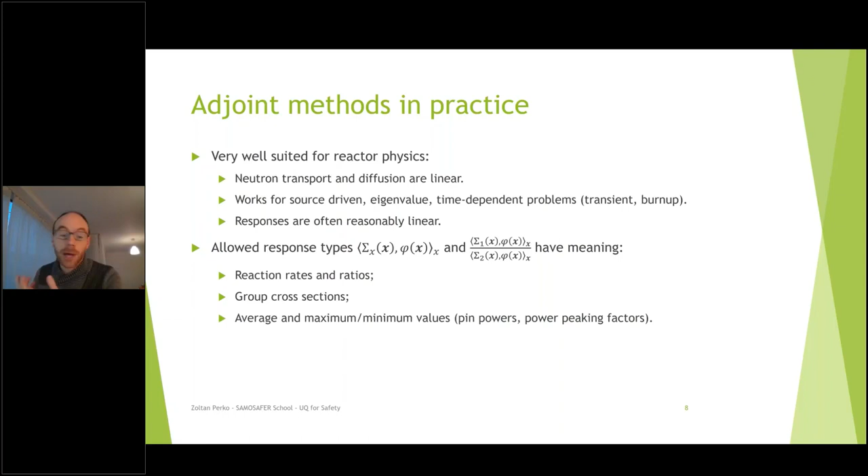For any actual use, the really nice thing is that if you look at most of the large reactor physics packages, all of this is beautifully implemented. If you use Eranos, there is an adjoint package. If you use Scale, there is a whole SAMS module that allows all kinds of adjoint perturbation theory. If you use MCNP, there are perturbation cards that allow you to use adjoint theory. So this is something you can reasonably easily use, even if you don't really understand the underlying math itself.

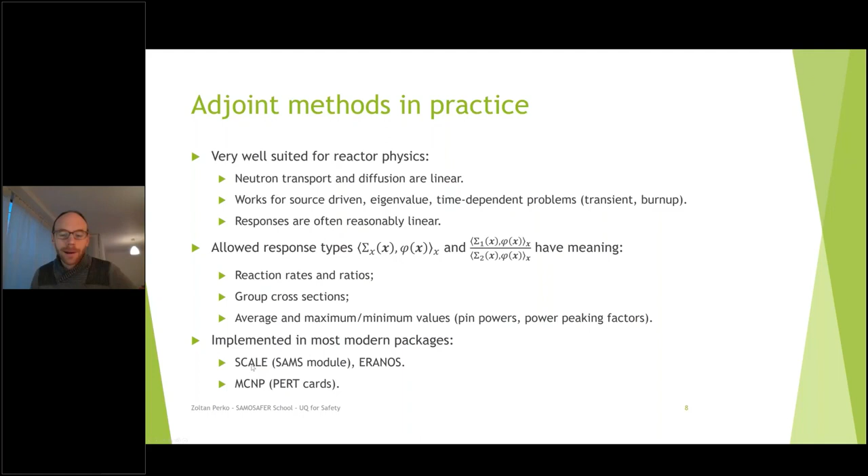I'm just going to give you a feeling of why you should do this. The really nice thing about adjoints is that it gives you immense amounts of information.

As I mentioned, the whole nicety is that immediately you get the derivative with respect to every single input parameter. What that means is that if you look at a certain response, for example the K effective, you get immediately the importance of every single isotope, within every single isotope, every single reaction, and every single energy group.

And of course, you can use this information to propagate the uncertainties. So for example, this is an example application we did for a gas-cooled fast reactor. It's not a molten salt reactor, but another of the Gen 4 reactors, where we looked at where the uncertainty in the K effective comes from. And then we figured out that the vast majority was due to basically inaccurate measurements of the uranium-238 inelastic scattering.

Now, of course, all of what I told you is very nice. One main limitation is this whole linearity thing, that it works nicely for linear systems and when the response itself is linear. And we know that, especially for safety applications, a lot of them are not really linear. When you have some very quick thermohydraulic transient, things may not be linear. So the next idea is, if linearity is not enough, then we should go to higher orders. And that is what spectral methods allow you to do.

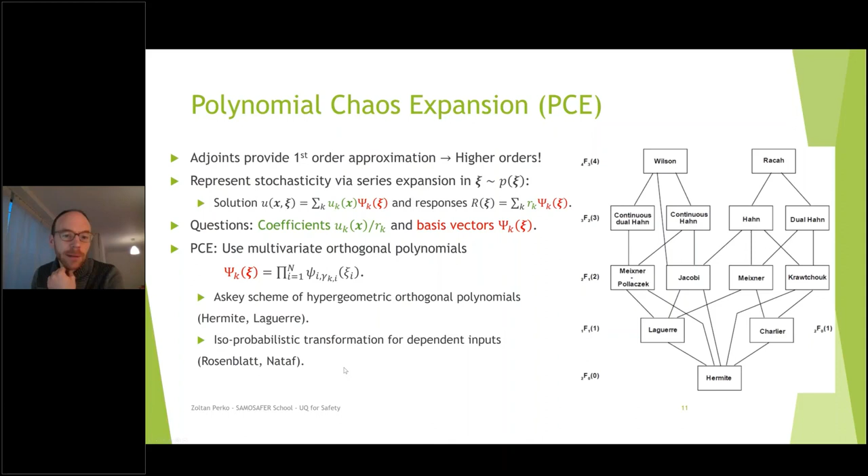So then the next question is, okay, we identified now - I defined myself what these basis vectors are. Then we have to figure out what the coefficients are. And there are two ways to do that: one is the intrusive way, the other is the non-intrusive way.

In the intrusive way, you do something very similar to what you do in standard finite elements, which is basically that you project your original PDEs onto each of the chosen basis vectors, Psi k. You integrate over your uncertain inputs, and you end up with a set of coupled PDEs that you would solve for these modes UK. This is exactly the same as how you do finite elements, where for the field you're solving for, you assume it has this series expansion dependence on X, and you project the PDEs on every single finite element basis vector, gaining a big linear system to solve for the coefficients. Exactly the same thing, except there we're working in the X space, whereas here we're working in the stochastic space, the space of the uncertain input parameters.

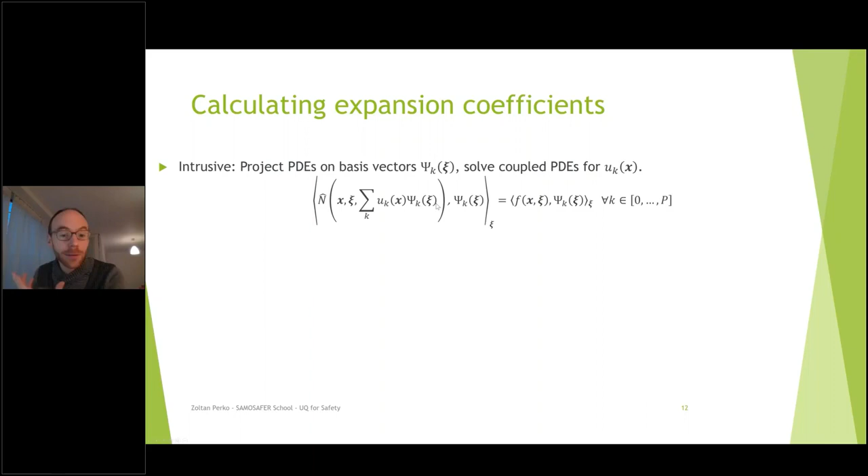The other way is the non-intrusive way, and for all the safety calculations, this is basically what you want to do. Because to do intrusive methodology, you would need access to all the underlying equations and discretization, which is not necessarily easy to do. In the non-intrusive way, you can do either a regression type of approach or a numerical integration type of approach. I'm just going to go through the numerical integration.

There, you use the fact that you yourself have chosen these multivariate orthogonal basis vectors to be orthogonal, and because of that, you can calculate the coefficients by calculating these integrals. The denominator of this formula is very easy, because it's just the integral of the product of the two basis vectors, which I chose to be typically known analytically. The tricky thing is the integral in the numerator, because there you need to calculate the integral over the dependence of the response on the uncertain input parameters. That's the thing you don't know.

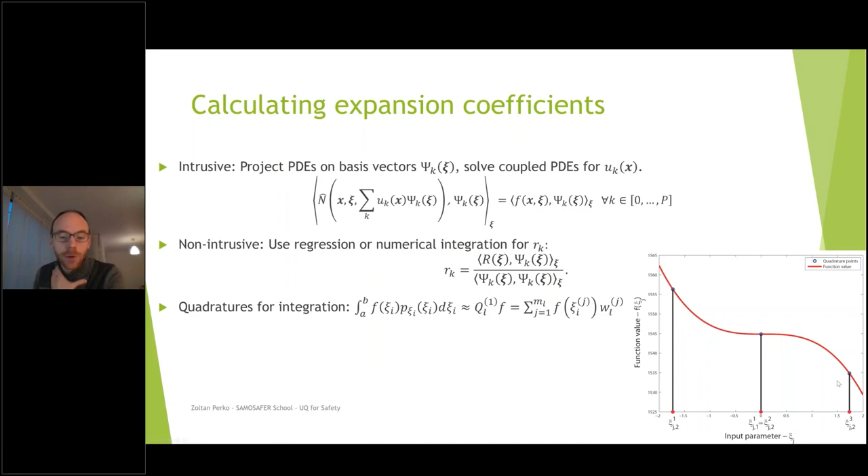So what you can do is use quadratures to figure out this integral. Quadratures are nothing else than basically one way to calculate integrals. If you have some simple one-dimensional integral, trying to integrate this function f, there's some integrating weight p, which in our case would be the PDF. All that quadratures say is that you can calculate these integrals by approximating them with a finite sum, which means you only need to calculate the value of the function at certain node values, xi i, and each of them has a given weight. So for example, if you use a 3-point quadrature, you have these 3 points, calculate the function at these 3 values, they have certain predefined weights, you weigh them and add them up.

Then, of course, there are different types of quadratures - Chebyshev quadratures, Gauss quadratures, etc. They are really minor differences. For this type of spectral method, typically Gauss quadratures are the best because they offer the highest polynomial exactness.

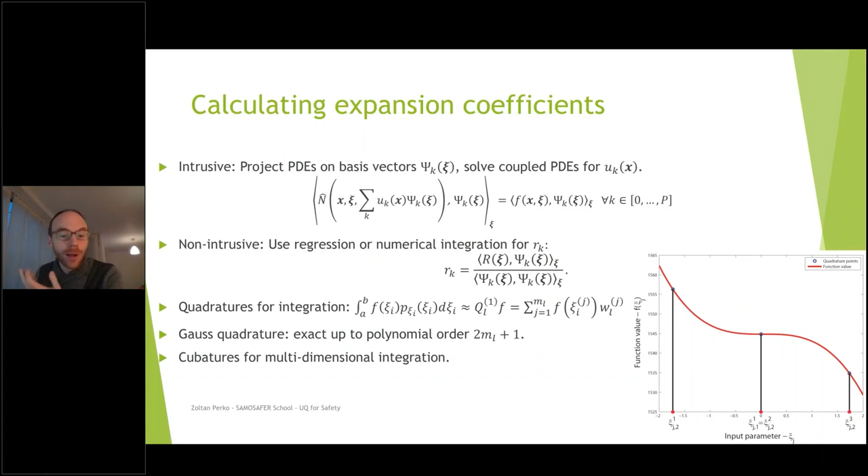You should remember that these are not one-dimensional integrals, these are n-dimensional integrals. But for that, you can simply tensorize these 1D quadratures, and in multiple dimensions they're called cubatures. All that means is that for every single dimension, you choose a different quadrature rule, and for the multidimensional integral you make all the possible combinations. So if I have 3 points in one parameter, 3 points in the other parameter, I make all the combinations, calculate the function value at these 9 points, use the corresponding weights - that's my approximation of the integral.

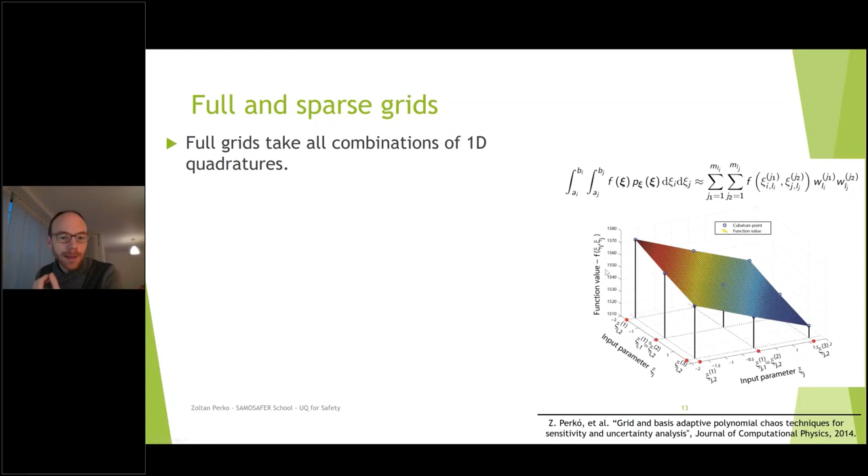And that already shows you that, okay, this is good, but it's also very costly. Because if you think of very high dimensions - remember that originally these dimensions were easily in the hundreds or thousands or tens of thousands - then if you take into account all the possible combinations with everything, very quickly you end up with absolutely infeasible computational costs.

And that's where sparse grids can help you. The idea of sparse grids is that when you look at these multidimensional integrals, you don't necessarily have to make every single combination of every single parameter with every other parameter. Instead, you should retain high-level quadratures - a lot of points along each of the parameters - and then when you make the combinations, you can combine lower-level quadratures, basically quadratures with fewer points, and that is going to be accurate enough.

With this, you can already spare quite a lot of points. And you should remember every single point here is basically a solution of your full PDE system.

The most computational saving, of course, you can get if you not only use these sparse grids, but do all of this adaptively. That means you would need to define some sort of error criteria that measures how important a certain region of the input space is. And then if you say, oh, maybe in this top right region, I don't have a good enough approximation yet of my response, so I need to add more points here. But maybe in this bottom left region, everything is very linear, very easy, so then you would not want to waste your computational time here.

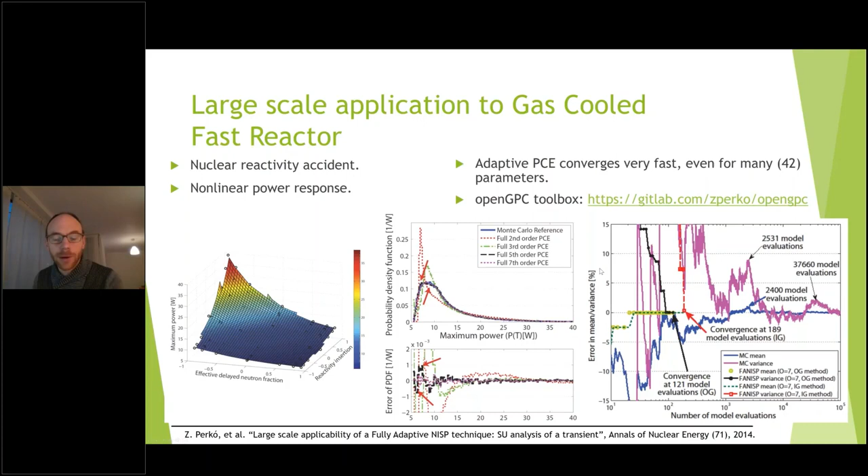So this was the two methods, PCE and spectral methods, and I want to finish off on sort of the crown jewel, which is reduced order modeling methods. Because what both the PCE and spectral methods really typically do is give you certain responses, and they give you how responses depend on your uncertain input parameters.

What reduced order modeling does, and I will specifically talk about proper orthogonal decomposition, is that it not only gives you these specific responses, but it really tries to give you the full dependence of the field. So how do you do this?

You go back to your original PDE. Of course, when you would solve this numerically, you would always discretize this. So instead of your solution field, you would get some solution vector U that represents things like the coefficients of your finite element approximation, right? And you would have such a discretized system.

And then what POD says, and pretty much what all reduced order modeling says, is that you can approximate the full solution field, or this vector field, as again a series expansion where you have certain modes U that really capture the main variability of your field, and they have different strengths, and these strengths depend on which part of your uncertain input space you are.

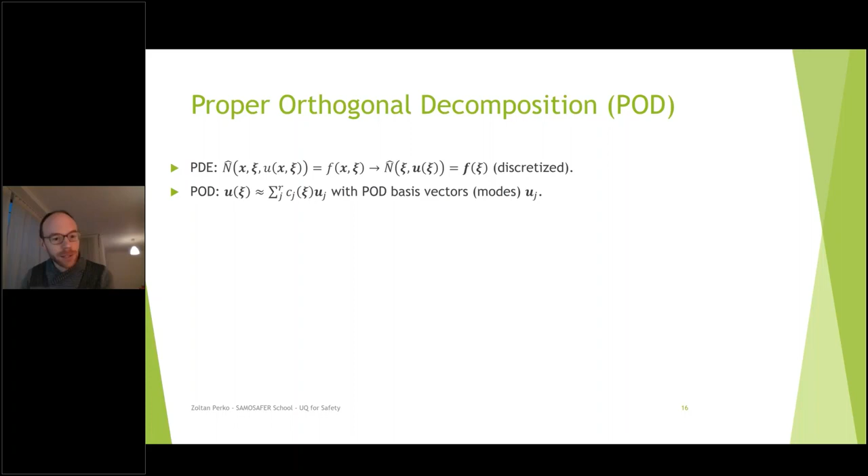You can very easily see that this is actually completely analogous to what we did with the spectral methods. There we also made the assumption that the solution is some series expansion, where one part depends on the uncertainty and the other part depends on the field. This is exactly the same.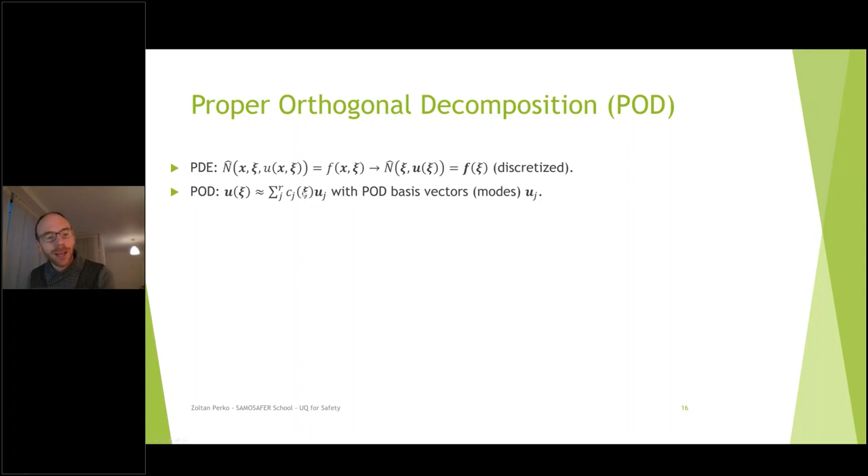The difference is that in spectral methods we fixed the uncertainty part. We basically prescribed exactly what this dependence was, and then we tried to figure out what the coefficients or the modes were. Here instead we fix the modes, and we try to figure out what the coefficients are. How do we do that?

Basically, we do that using singular value decomposition. What that means is that you produce a snapshot matrix, which is just the solution vector that represents the solution at different input parameter combinations. You put that into one single matrix, and you do an SVD decomposition on it.

For all intents and purposes, you can think of SVD as nothing more than a matrix decomposition that gives your original matrix as a product of three separate matrices, where U and V are orthogonal matrices and sigma is a diagonal matrix. When you look at U, the columns of this U matrix give you your modes. These are the modes that really capture the essence of the physics of how your field can change because of changes in your input field.

Some minor details: the singular values are in this diagonal, and they represent how much of the overall information a certain mode contains. So typically what you do is define some kind of threshold value, and based on that you say you want to retain, let's say, 99% of the information, and that tells you how many modes you need to retain.

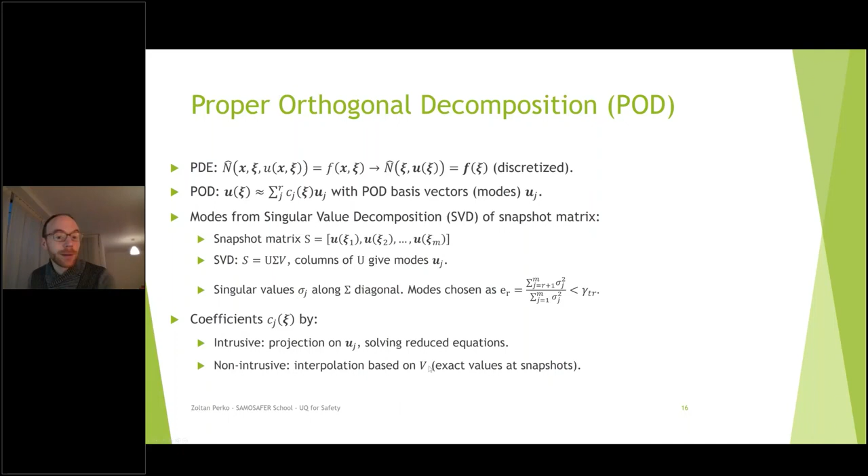And you use that based on the exact values that you have in the V matrix. So one way that we did this, we went back to sparse grids. Why do we do that? It's because sparse grids are a very nice and computationally efficient way of sampling your input phase space.

Now, because here we are using these sparse grids for interpolation, you would choose a different type of quadrature. For the integration in the spectral methods, we used Gauss quadratures. Here we use basically just equidistant nodes.

That would mean that level 0 is just 1 point in the middle. Level 1 is 3 points in every single parameter. Level 2 is then the 2 points in between your previous nodes. Level 3 again, you just add points in between your previous parameters. And of course, in multiple dimensions, you combine these points.

Then for the interpolation itself, of course, you are free to choose any sort of interpolation. You can try radial basis functions, Lagrange interpolation, etc. What we found was one of the best ways to go is piecewise linear local basis functions.

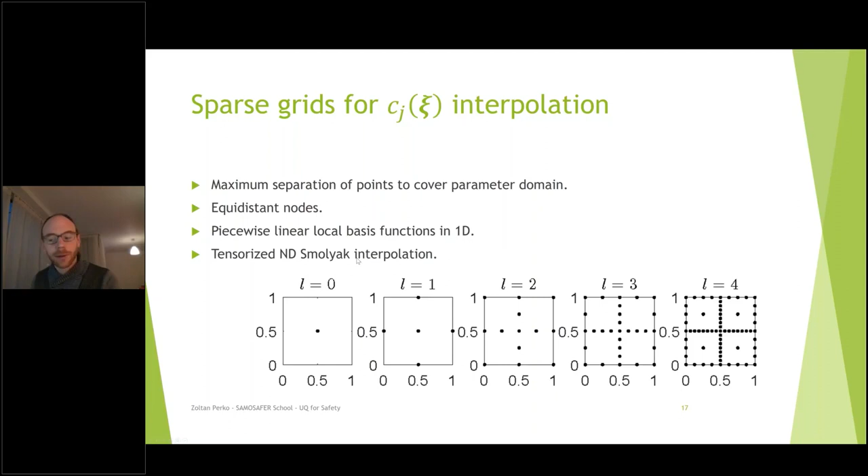Basically, for every single point, you will have a corresponding piecewise linear basis function, and you build them up hierarchically. This is how you do it in 1D. Then to get the n-dimensional interpolant, you would just tensorize them the same way that you do with the spectral methods.

Why this is really nice is because it can be computationally very efficient, and it allows you the same type of adaptivity that I showed you in the sparse grids in the spectral methods. We need that because even if you use classical sparse grids, you still have this problem that if you have many dimensions, very easily you end up in a situation where the number of computations you need to do, basically the number of times you have to run your safety calculation, just goes exponentially.

Instead, if you use adaptive sampling, you can focus the sampling and the computational effort where you are still inaccurate.

So for example, if your true dependence of a coefficient is this sort of half paraboloid, then at the first level you would just calculate this one point in the middle, and my first approximation is that everything is just constant. Then I can look at the child nodes, the endpoints, and see how wrong I am. Well, clearly I'm quite off here.

Then I will add the local basis functions at these points, and these local linear basis functions are always just hat functions. Then you can get a much better approximation like this. As this is an interpolant, you are already accurate in all 3 points, but you are still a little bit off in the middle of the domain.

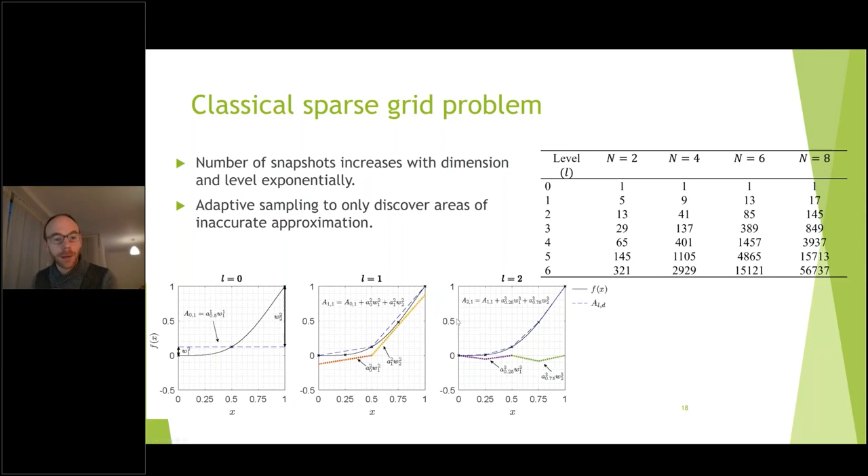Then again, you can refine your interpolant. You can add these local basis functions that are only connected to these points, and adaptively refine your model as good as possible.

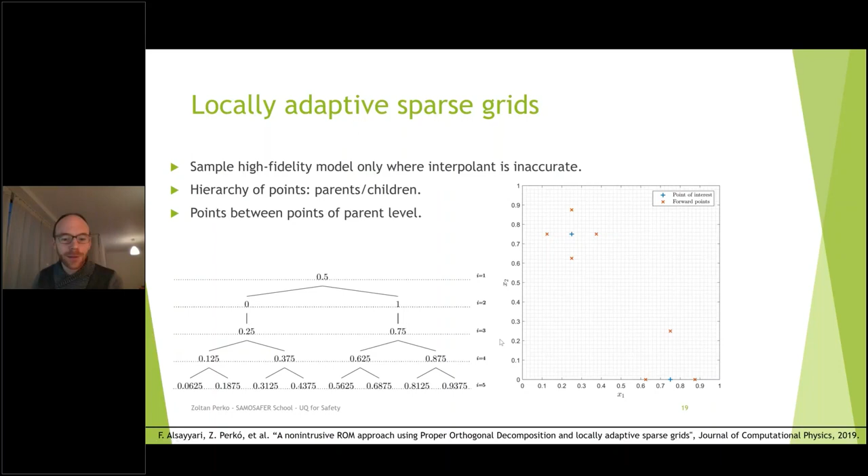You can, of course, extend this to multiple parameters. Basically these are small details. Again, I put here the reference if you are interested.

What is really important is that via this sort of hierarchy of your points in the uncertain input phase space, and properly defined error indicators, you can drive and focus your computational effort where it is really needed. And of course, that can give you massive computational savings.

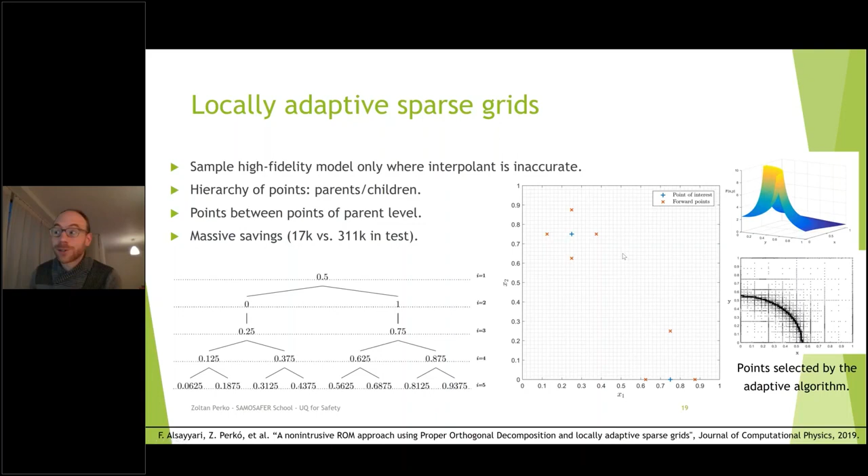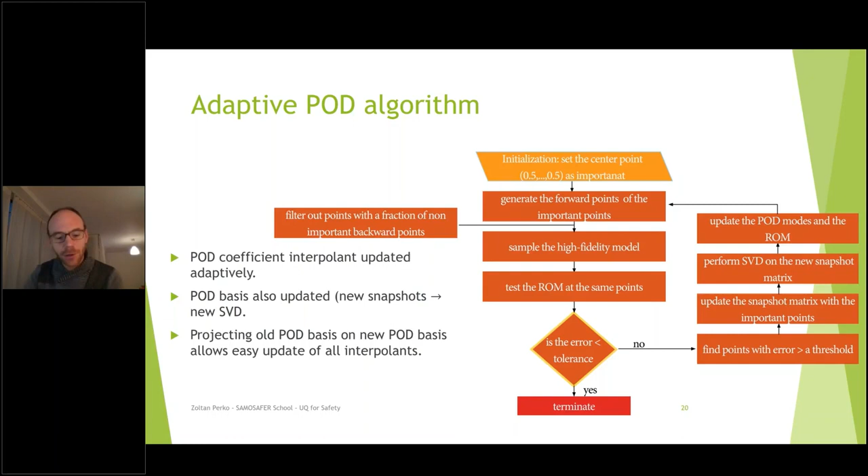Just to show you an example, I'm going to skip over this. This all has to do with adding the adaptive basis construction on top of your adaptive sampling strategy, just for additional savings.

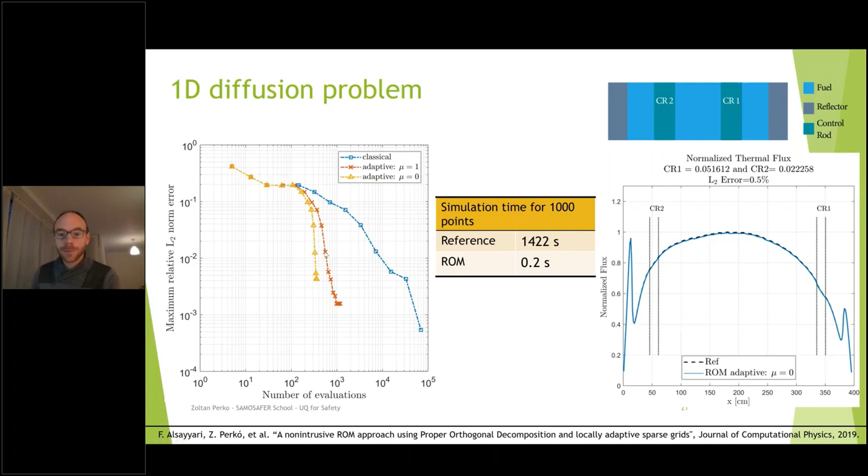It's not really important. What is important, however, is that with this type of adaptive reduced order modeling, even for such a complex model, we were able to build in a very computationally efficient way very accurate models of full fields. This is the result for the fission heat, this is the result for the temperature field, and this is the result for the effective multiplication factor.

You can see that even though we took into account 30 input parameters, we could get these results with 61, 63, and 1,600 calculations. And of course that also shows that the most difficult part of this is the K-effective, because for that we needed many, many more calculations than for the temperature field and the fission density.

But once you have these models, you can achieve massive savings, because the original runs take around 4 hours, and I think it was actually on 12 CPUs, whereas running the reduced order model is typically a fraction of a second.

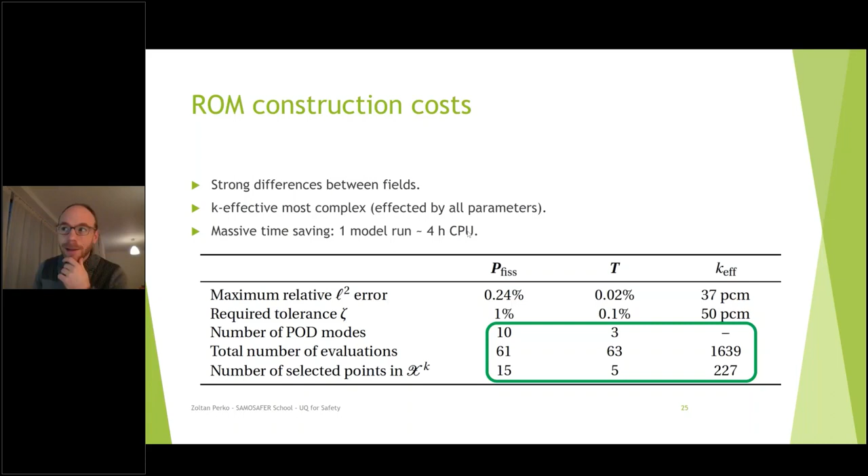And then to finish off, these are just some nice results of the accuracy. You can see that in the whole field, we can reconstruct with around 1 to 2 Kelvin accuracy, I think.

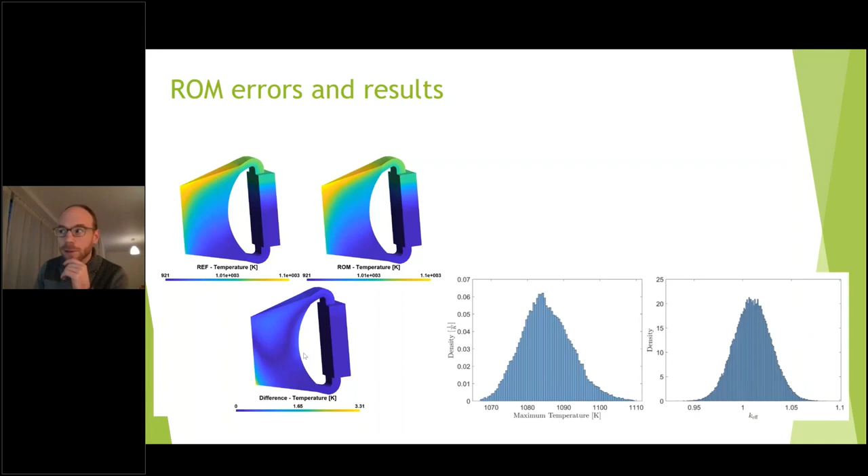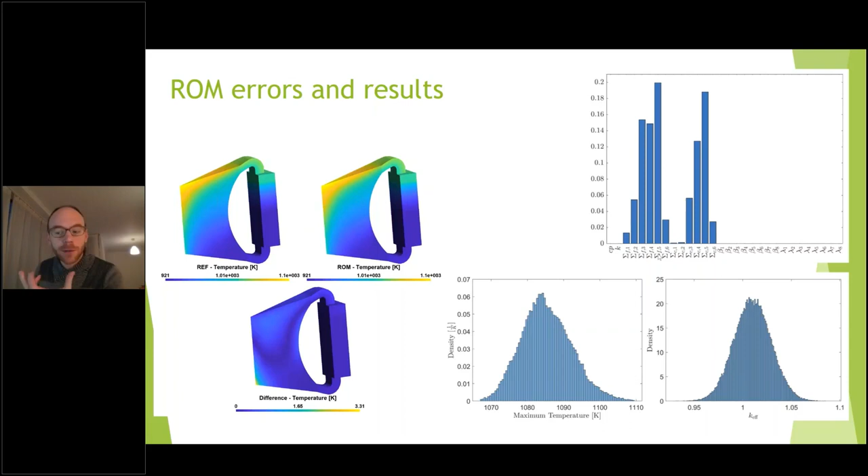We can derive exactly these probability density functions that we are interested in, because this is how you would try to figure out probabilities of a failure or being over certain limits. And again, you can also use this for a similar type of sensitivity analysis that the adjoints allow, so you could look at which input parameter is most important for what response.

One nice thing is that all of this works also for time-dependent problems, and it also works for adaptive sampling in time, which is always something quite tricky to do in reduced order modeling. What we came up with is a method that can adaptively sample both in the parameter space, the input phase space, and also in time.